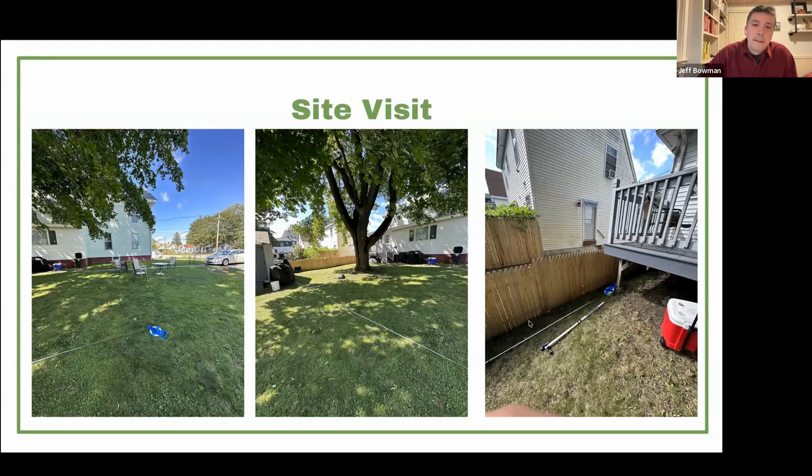This next image was one we did, and we gather as much data as we can beforehand from the computer, from GIS, Google Maps, Google Street View. This is one we couldn't see right before we came, and said, oh, there's a big retaining wall. That backyard we see from Google Earth, that wasn't there. So we're trying to figure out what is the buildable area — we need to document this. Where is it? How tall is it? So that as we're back in the office creating that plan, we keep this into consideration, because it's going to impact where you can build the ADU, it may impact utilities, and it may impact site access. That's all things we want to consider within the goals of the project.

So this is one of those we're highlighting to say that site visit is valuable, because you don't always see it all from the computer — the bird's eye view of Google Maps doesn't quite capture this. That's funny.

Okay, so utilities: water, sewer, electric, those are the big ones. Sewer and septic, private or public sewer. Depends on where you live and what your existing property has. But we typically have a checklist to run through when we're talking about septic.

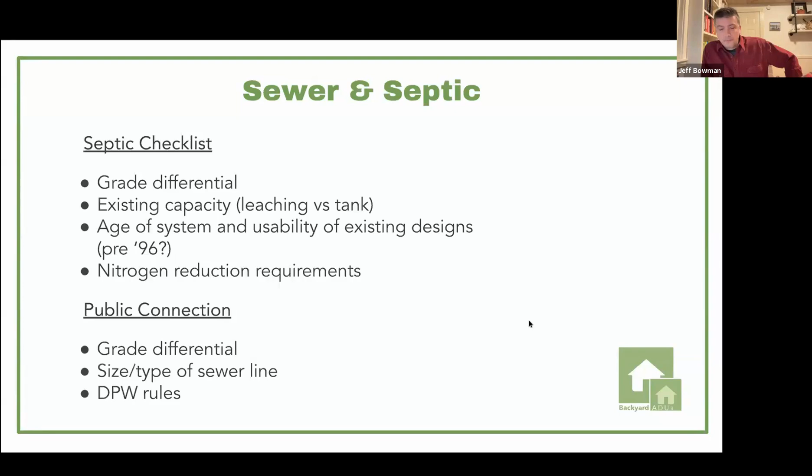Public connections have been the same thing—I'll keep my Massachusetts framework going—they're now allowed by right. DPWs control water and sewer connections, and every town is a little particular about what they want to see. So if we've already built in that town, we'll already know how the DPW does it. If we haven't, we'll make some phone calls and try to figure it out. The goal here is just to capture big risk, figure out what's there, how do we get there, and what might some associated costs be.

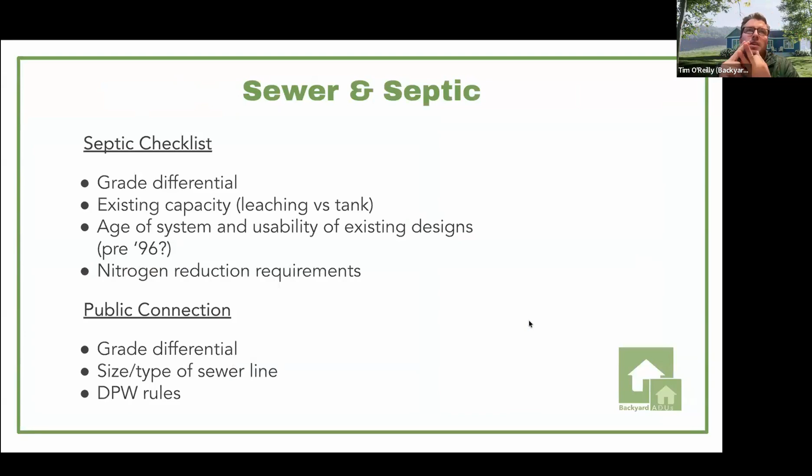Yeah, exactly. Where can the connection be? Each municipality can have a different idea of where the connection should be, so we have to play by their rules when they are picky about that kind of thing. But this is what a septic system looks like.

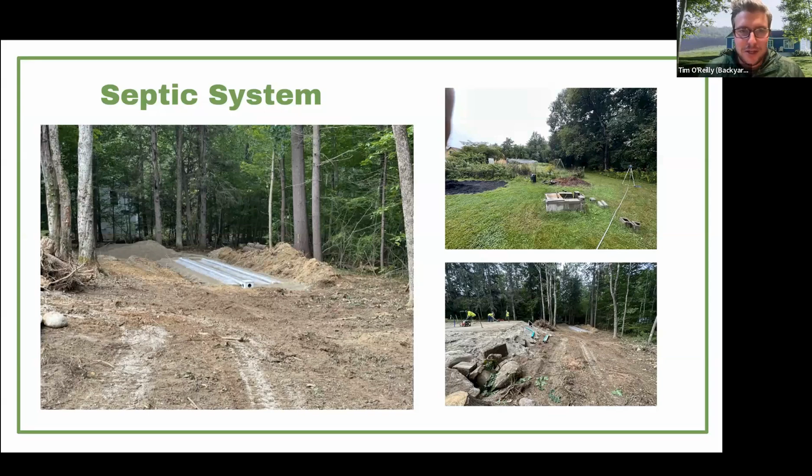Well, or if they're not playing by the rules, we'll call the attorney general. There's been a lot of success stories in the past year where towns have basically put up a stink through DPWs requiring excessive costs and connections, and the attorney general has helped reverse those decisions. We have houses currently under construction that benefited from that work. So it's just been great.

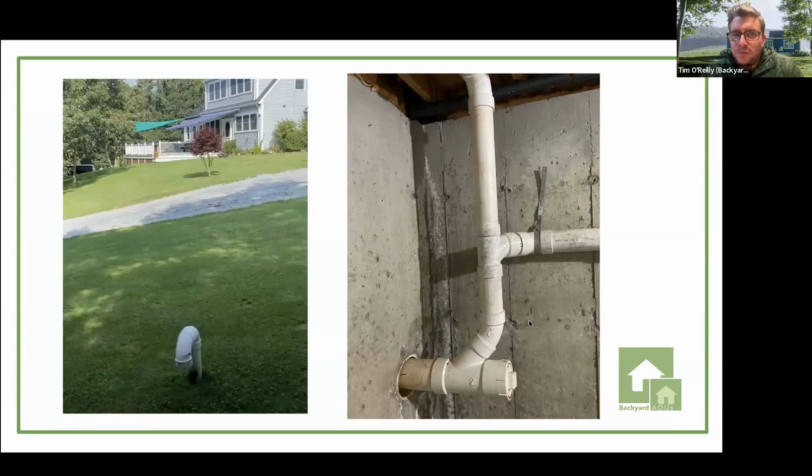I'm trying to get to it, but I don't know if it's in this slide. It must not be. I thought we had one highlighting where you could connect sewer and that kind of equalize, but it's later, I think. Okay, yeah, you can look at that one. Do you want to say anything on this?

Oh no, the next one we'll look at is, hey, you may have records either in paper or digitally. We'll often also go to the town and say, hey, what records do you have of that septic? Because we want to figure out—we can see everything in the basement and sometimes things in the yard, but what is in the ground?

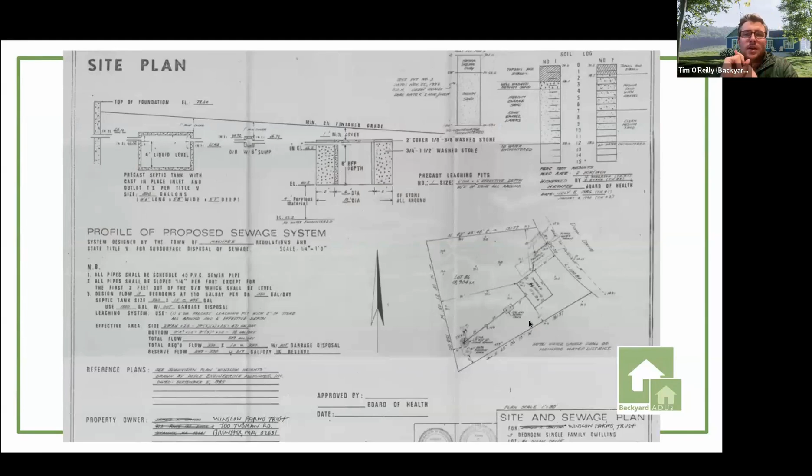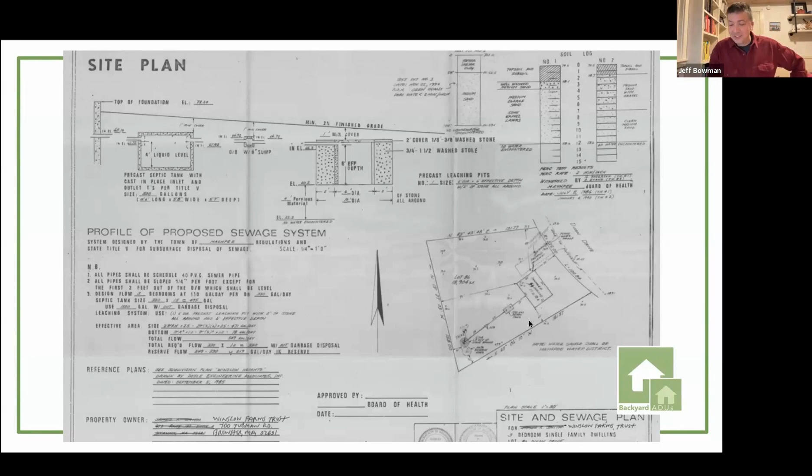Because that's going to inform our plan. Yeah, it's helpful to have, oftentimes when you're closing out a house, it'll kind of come with the paperwork, things like a septic plan or a survey. Those are helpful things, and if you can do a little legwork and find them, our team appreciates it. There are online avenues we can attempt to try to find what's written down. Some municipalities, I'll speak for up here in Maine, don't have a good record keeping system, so we might not know unless you're able to find your physical piece of paper what is going on there. So, okay, water.

Wells. Where's the well? Sometimes it's obvious, sometimes we don't know. That's another one where we'll see what the infrastructure is in the basement, document it, and if we can find it in the yard, awesome. There's a couple different ways depending on what's there, how we would connect.

Another one, sometimes there's information, maybe on the bottom of that wellhead cap that tells us how deep it is, the casing, the refill rate, how many gallons per minute. Oftentimes that information doesn't exist. We can go order a test, pump that thing dry, and calculate what's the refill rate. Other times we analyze the infrastructure that's there and say, hey, we're going to connect and we'll see how we do. If we have a water pressure issue, we can add more capacity or a booster pump. Relatively, it's all sort of low hanging fruit, but again, let's figure out where it is so we can take that into account.

Often, if you're on a well, you might also be on a septic system. Especially here in Massachusetts, those Title V rules require us to be certain distances away from these components. So we want to do our best to find them up front, because that will inform where our buildable area is, where this can go.

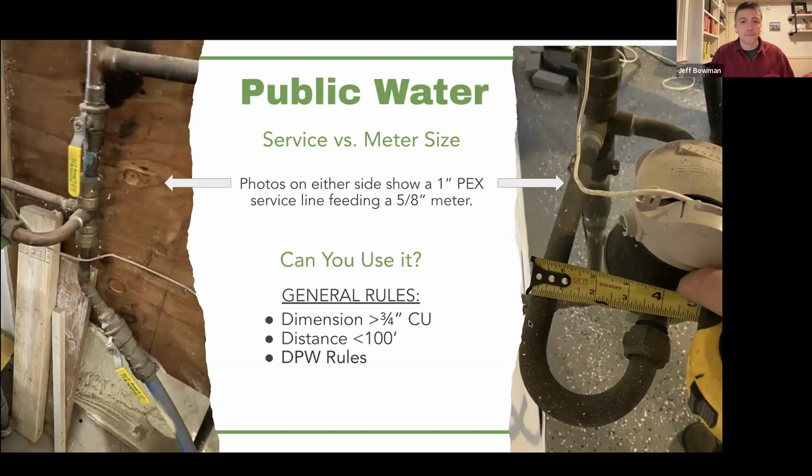This was one we did, and often all those utilities are in the basement. I think this is one you did, Jeff? No, this is not mine. I think this is a Mass one. So yeah, it was like, hey, let's go into your basement and find the water, the sewer, septic, and the electric panel. Oh, you have a music studio down here.

Great. When we're then going back in the office to analyze the best way to route these utilities, obviously we have to take this into consideration. We're not going to run a water line through the music studio. So part of what we'll document down there is where are these utilities, and what's the level of finish of the basement, because that will inform the strategy for connection. If you have a finished basement, we'll just avoid going down there, and it just means it's part of the equation of figuring out what the best utility connection is.

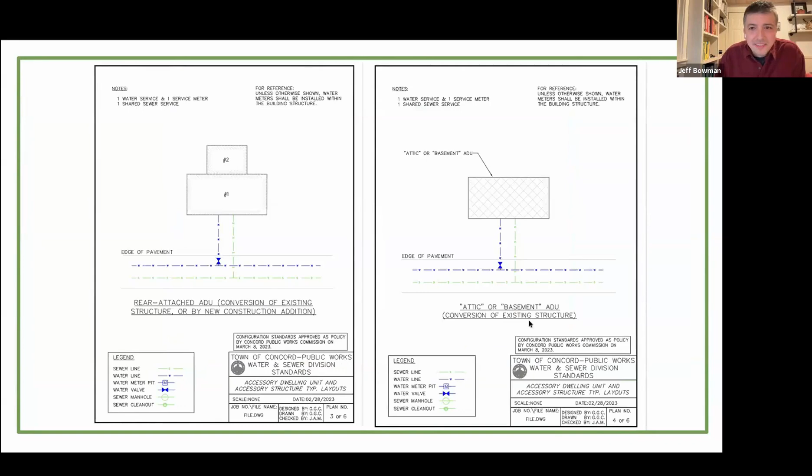DPWs—I hand waved this earlier, and I think the example slide next was one of the ones we worked on in Concord a while back. They were very clear on what they wanted to see. I think it's actually the next slide. Our ADU connection.

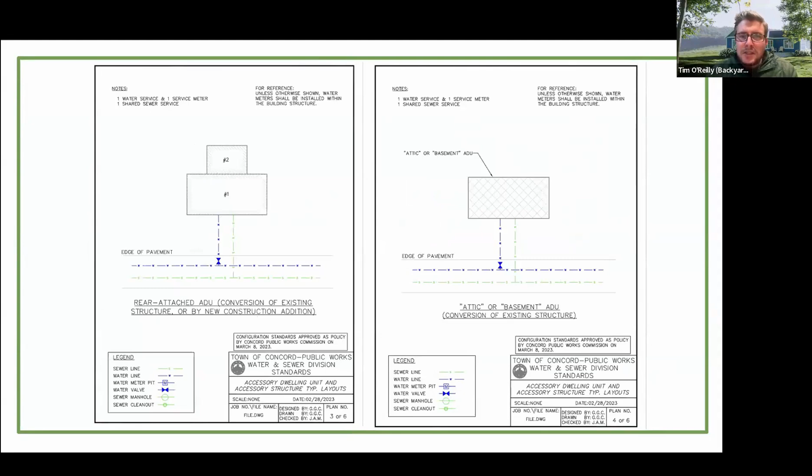They basically wanted us... there it is, wait, go one more here. Let's go back. Which one was it? Go back one. It was pool houses, and then they had attic or basement ADU you can share within the house. If we go to the next one... they basically were saying, hey, now that we're detached,

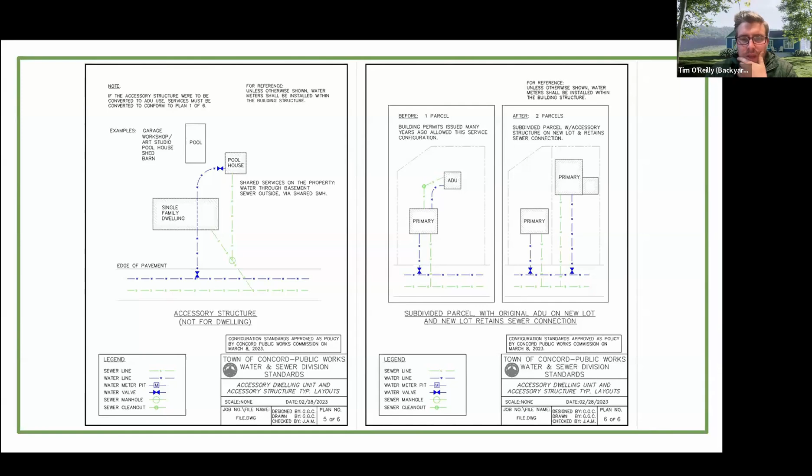They wanted to see us have these different connections. So some towns, like Concord, publish this guide. It's very straightforward and clear what we have to do.

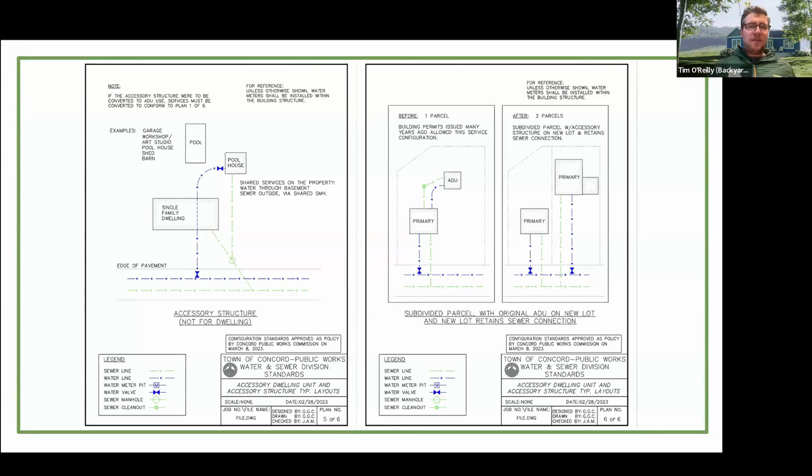ADUs are so new that not every town, not every DPW is up to speed, and it's a little more ad hoc—at least in this first wave. As projects are getting approved, DPWs are changing their standards. We've experienced this firsthand where the first one we built in a town, we did it one way, but now they want to see it done differently after more have gone through.

The important thing here is we figure out what the strategy is, and then what the cost implications are going to be.

In Concord, they have a rule that says if that water line is more than 50 years old, regardless of what you're doing for this project, you have to upgrade it—dig it up to the street, new line. We know most of these houses in Concord are more than 50 years old, so a water line replacement just gets priced in at the feasibility level. We say, we've got to plan on probably another $10,000 to dig up, replace the water line, and move the water meter because we're going to have to at the next stage. That helps us inform the strategy and the cost.

To be clear, with the feasibility study, we're giving estimates—educated estimates. We've done these things in the past, so we'll put a number like $10,000 in there because the last one we did was right in that ballpark, or the last few were. Maybe one was $9,000, maybe one was $11,000. It depends on the site, the trenching, and those types of things. So we'll put in estimates, but they're pretty educated, dialed-in estimates.

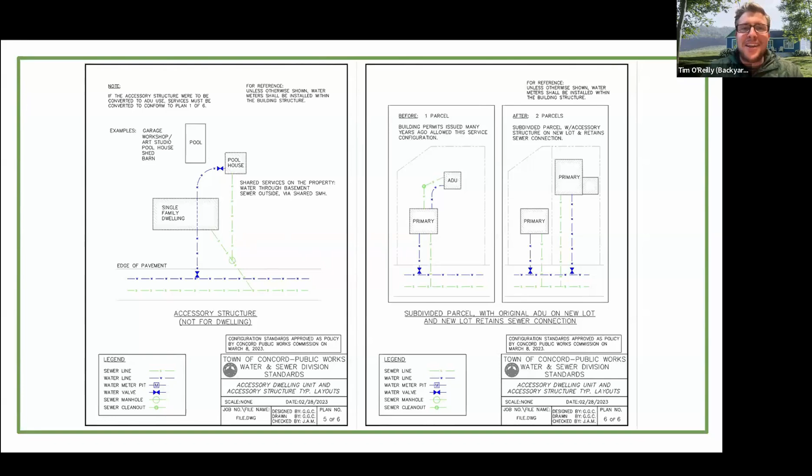One good point too—there are towns we haven't built in, and we're super transparent about that. It's like, yeah, we've done this, we've done a lot of it, but not in your town. There's actually a question in the audience: have we built in Norwood, Mass? The answer is no, we haven't. We've built around in towns around Norwood. But if you're thinking of building in Norwood, we'd have to figure out how the DPW there wants to see these connections and what the cost implications are.

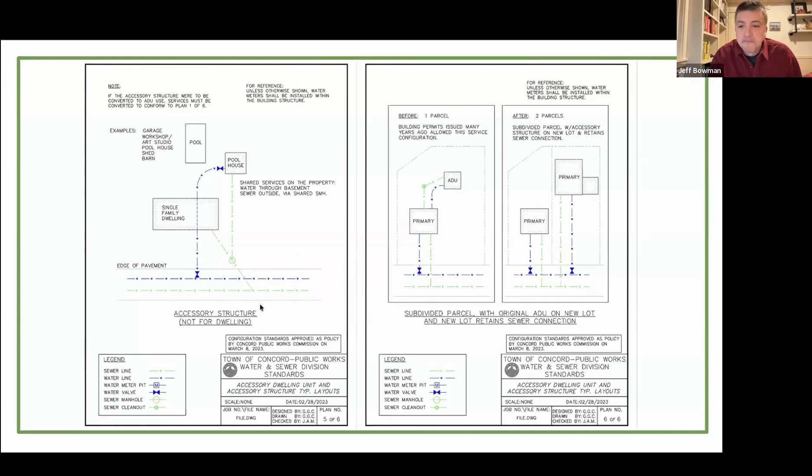Great, okay, we'll keep going. I had a couple more things to say, but we'll keep it going. I want to get to that live feasibility study.

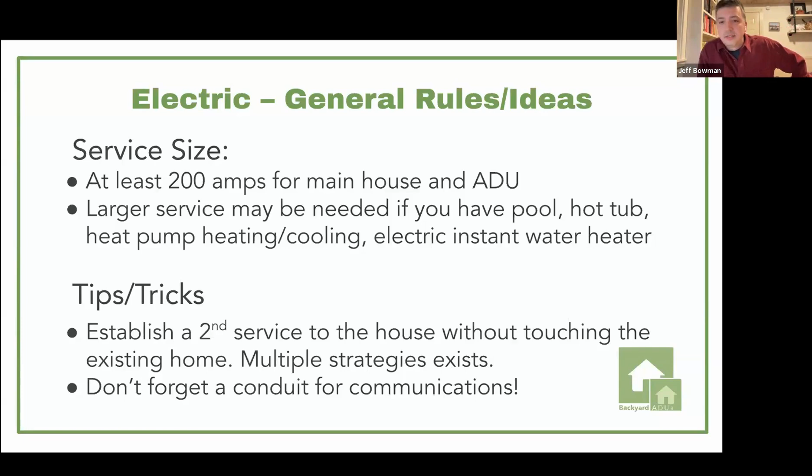Generally for electric, we like to do a 200 amp service for an ADU, and we do separate services. The primary house keeps its own existing service, and then we typically do a new 200 amp meter and service for the ADU. We like to build all-electric—not to say you can't have a wood stove if you'd like, but our typical spec is an all-electric home. There are things that break the rule, but in general, that's typically what I see on our projects.

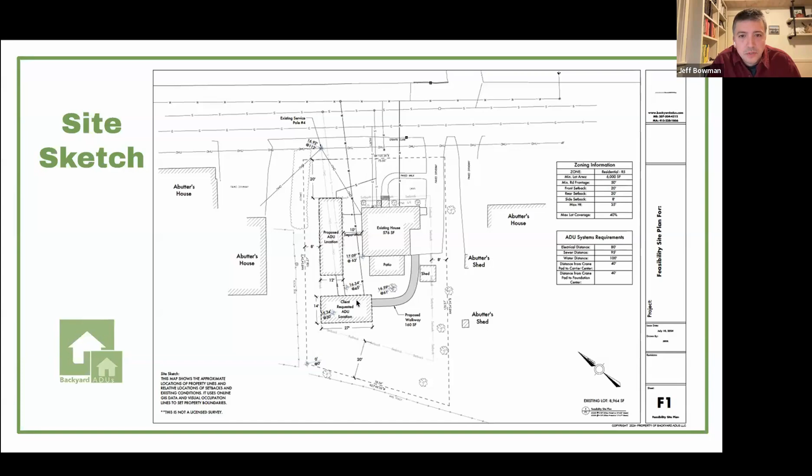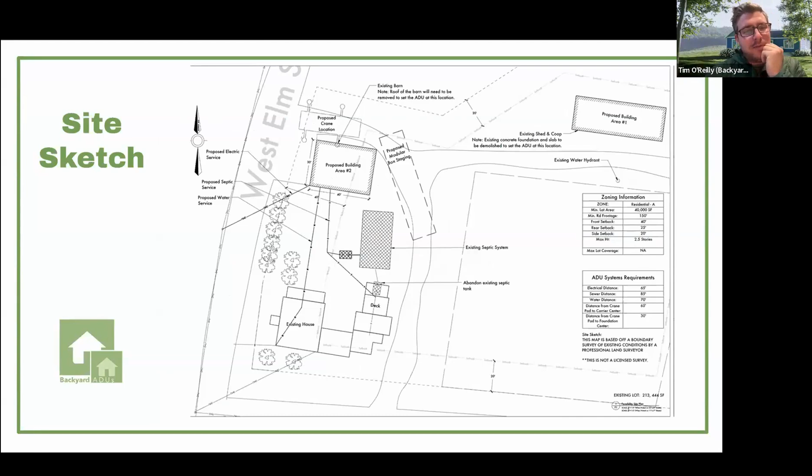We have one more sketch here. This one was another twofer where there were two locations. The clients were thinking, hey, we're going to do it way far in the back. The feasibility study is a great tool to highlight that it's going to be freaking expensive way in the back. So let's look at an alternative - how do we connect, and then look at the cost differential there. Crane staging is easier, utilities are easier, we're going to connect to the system that's there, the power's at the street. Going all the way back is going to be X, Y, and Z more expensive.

Jeff, there's a great question here. I have a hill in the backyard. Have you done an ADU on a hill before? Yes, we have. Absolutely.

So there's going to be a few things to consider with that - foundation comes to mind. What is underground there? Is it a hill of rock? Is there anything buried under there? There's some simple things like that. But short answer is, yeah, we can. We're gonna need to think about access, so you might have a staircase going up to it. Just a couple things we'll need to talk through. But short answer is yes, and we do it often.

We if we can - I was saying to Tim, I don't know if we were online yet, but the feasibility study I did today, they want to do a walkout basement. They were on a hill, so...

There's a couple more questions. I don't want to fully derail us - maybe we'll get to the report and then we'll answer them. So thank you for your patience on the questions, we'll get to them. We'll rip through these here.

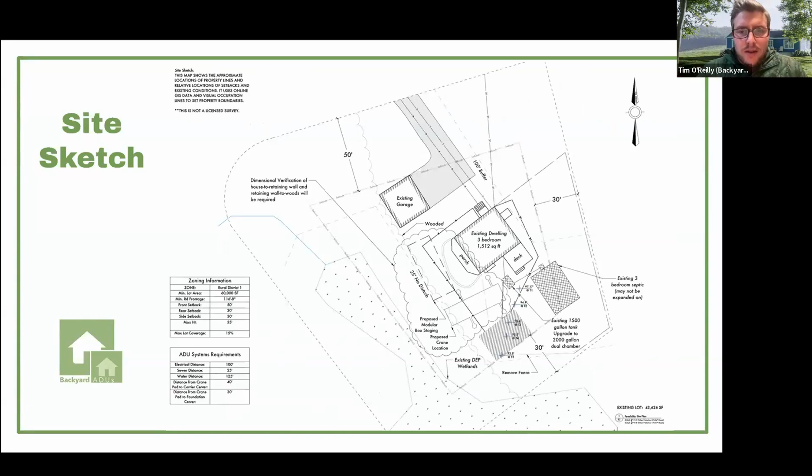This one looks like it has some wetland overlay that was going to need to be factored in. This was the wetland, both from a building setback perspective, but basically also here, septic-wise. So there's an area to say, hey, this is here, but you also have a septic, we're going to need to figure out what works for the ADU. We also highlighted some of those setbacks from those wetlands at an early stage. We haven't hired the wetland scientist, paid them $600 or $700, the surveyor, et cetera, but what do we know based on the GIS, based on what's there? This one was really tricky, so we had to really figure out how to make it work.

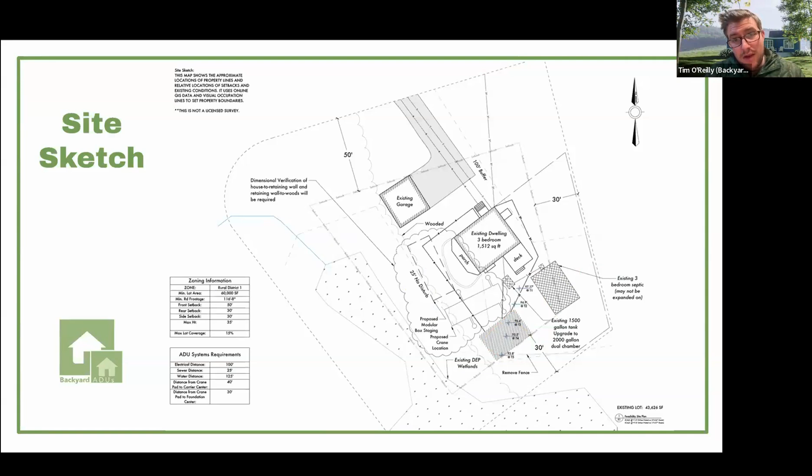The report itself has seen many iterations. Someone who came back to me from 2 years ago, I was like, can't believe the report used to look like this - we've really dialed it in. The goal is basically to say, hey, what is all there, what did we find, and what do we propose? It'll basically be the key three on utilities, it'll also be those site impacts, but it also gets filtered through construction and engineering, through the design team, and all that boils down at the end to the budget.

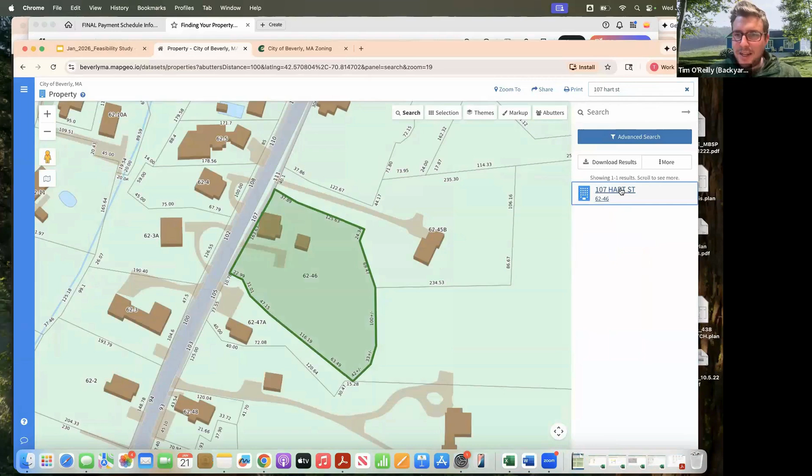Cool, let's go here first. Every town may have a different GIS provider -- this one is MapGeo. I'm going to find the search bar and put your address in. You can see my screen, right Jeff? Yeah, we can see it. Okay great, some of these are a little finicky as I'm searching. All right, we found the property -- it's highlighted here. I'm going to click on it too, because that will bring up some additional resources and information.

We want to come in here and look -- hey, what are some of these things? Someone asked earlier, hey, if I have a hill, can I do it? Let's go see if we can get some layers. In MapGeo, I'll click themes and see what kind of data they have -- topography. Great, so now we can see these are 2-foot contours. We can get a sense that there is a bit of a hill sloping up in the backyard, but things seem relatively flat around the driveway and house area. In Massachusetts, let's see if we have DEP wetlands data -- do they have any wetlands? All right, nothing came up -- that's good.

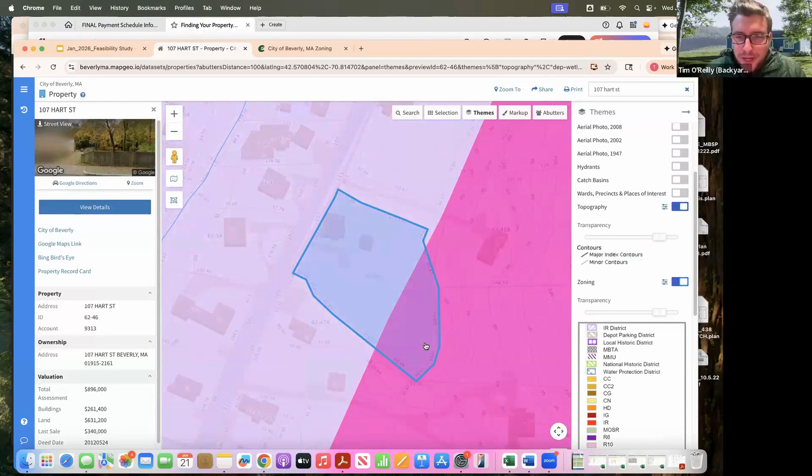Let me click on zoning here. Sometimes this is helpful - oh, in this case, this is very helpful. You're in two different zoning districts, so we're going to have to look up the rules in both. Oftentimes the town applies the one that's more strict. The annoying thing about these layers is we have to zoom out to figure out what's what. So you're in both the R15 and the R45.

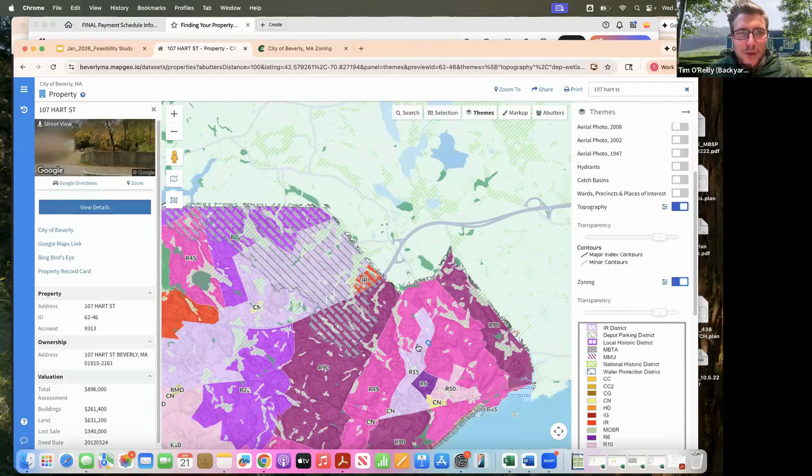Will you help me remember those, Jeff? Yep, sure can. Okay, all right, so I'm going to turn zoning off because it's too bright.

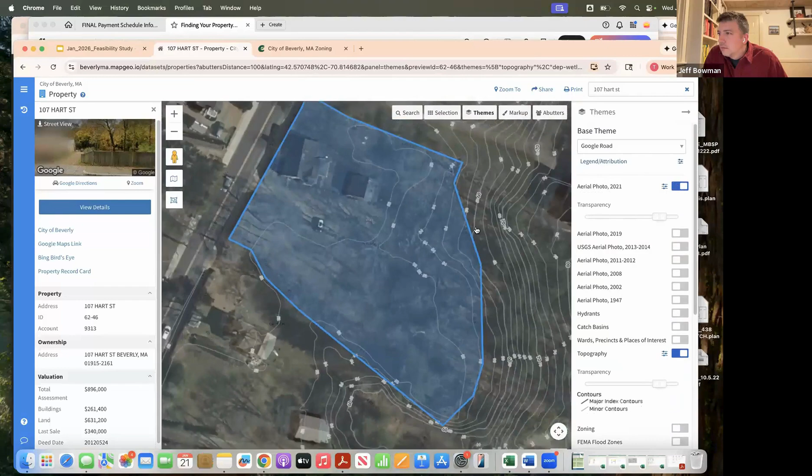While we're here, let's see what the most recent photos they have are. 2021, let's go look. Great. So, got some forests, some not.

Let's go check Google, let's see what we can see there - they might have a little bit better of a view. Looking at this layer, we can see the property line that's also in the GIS, but I really want this for the satellite imagery. 2026 - a recent photo, I guess, from the fall here in New England looking at the trees. So there's a lot of woods and trees back there.

Let's see what's on the road. Is that the right side? Yeah, I think it's the third one. It is this one, okay.

Jeff, going through our utility stuff, what do you see here at the road? Yeah, we've got an overhead connection, and we've got the electrical main coming down on the other side of Hart Street here. Looks like, in terms of placement, I would assume that we're on public connections for water and sewer, but we'd obviously check in with the customer.

In terms of site access, you've got this extra driveway here, and some fencing may need to have a section removed for set day logistics - relatively low cost, and then we could replace it. I would imagine that where she's wanting to put it would be in this nice big side yard with the trees. Looks like a tree or two or three might need to come down, but they all look like normal trees.